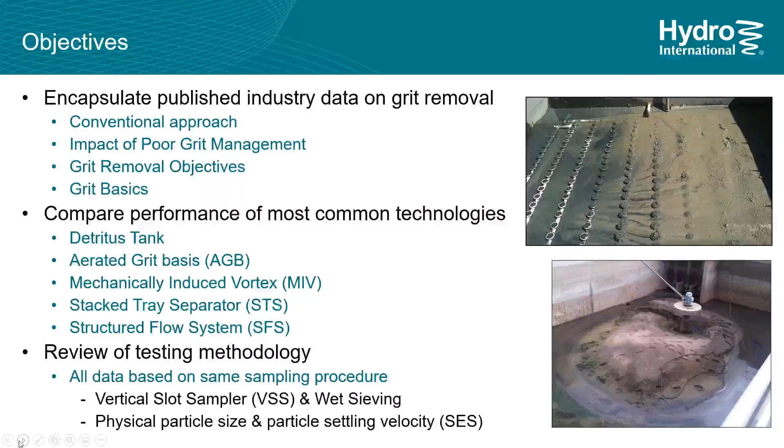The objectives of our presentation today are to encapsulate published data on the conventional approach to grit and why it has not protected plants from grit deposition and abrasive wear, the impact of poor or conventional grit management, grit removal objectives, and grit basics. We'll compare the performance of the most commonly used grit removal devices using a single consistent test methodology. By using the same test methodology, a comparison can be made of these common technologies. We'll also review the test method used and why it was found to be consistent, repeatable, and effective.

Grit management historically has been undervalued and until recently, in many respects, ignored. Traditional design guidelines have not protected plants from abrasive wear or deposition, and ease of grit system operation has been more important than the removal efficiency.

The current trend is to put a higher value on grit, similar to the trend the industry has seen in screening over the last number of years. Conventional screens were often very coarse, maybe 3/4 inch, while today probably the standard of the industry is about 1/4 inch or 6 millimeter. The trend has also been driven by advances in treatment processes. Plants are getting smaller and achieve better effluent quality in a smaller footprint. The smaller footprint leaves no capacity to store grit.

Advances in sludge processing and disposal options are less tolerant of both rags and grit. And plants are also operating with tighter budgets, meaning less staff and less funding to clean and repair equipment impacted by grit. But there are still challenges.

There's no industry standard for sampling or characterization of grit, nor a standard performance or removal requirement. In addition, owners and engineers are forced to navigate a field of what can be conflicting performance claims made by various equipment manufacturers using differing test methods, which makes these claims difficult to verify.

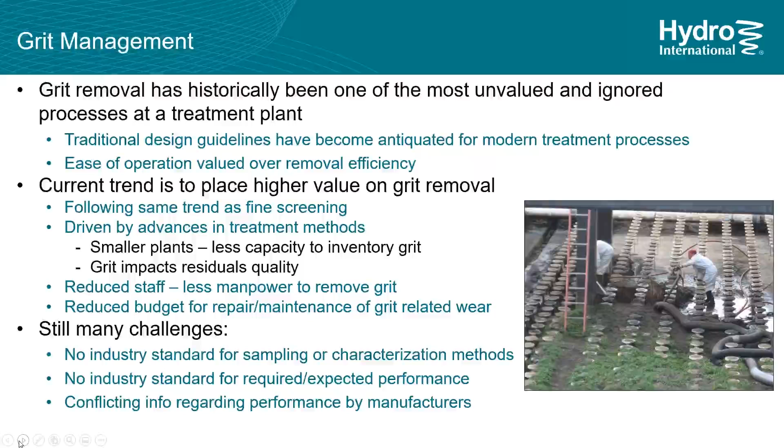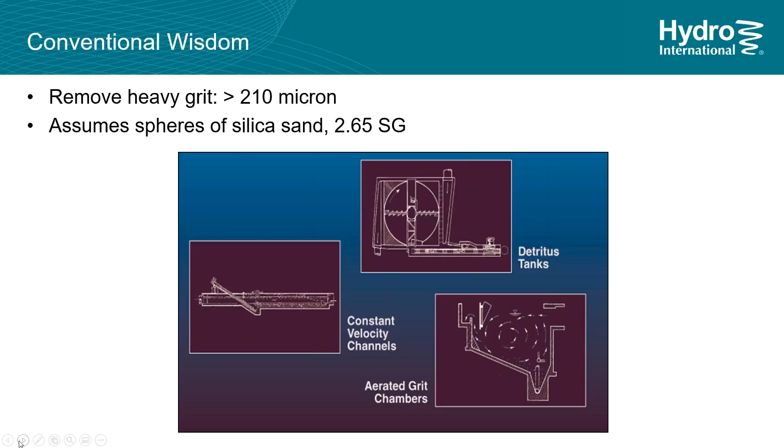So let's start at the beginning with the basics. The conventional wisdom or design point for grit removal systems has been 210 micron particles and larger. And that design point also assumes that all grit are perfect spheres of silica sand, all 2.65 specific gravity.

I traced this design point back to a 1942 paper written by Dr. Thomas Camp for Sewage Works Journal. The article was written when he was still a university professor and had not yet left academia to form Camp, Dresser, and McKee. Millennials, you may know the firm better as CDM.

And no, this picture is not Dr. Camp, but it is representative of the era and the technology of the era to show how long ago this design standard was adopted. In 1942, treatment processes were much less advanced and needed less protection from grit as well as screenings. At the time, many plants only had primary treatment processes. Secondary treatment processes were just being implemented and were not yet mandated.

In the paper, Dr. Camp states that experience, not data, indicates a 0.2 millimeter or 200 micron design point, and it generally removes grit, which gives trouble in treatment plants. That paper set the design point that has remained virtually unchanged and unchallenged for over 65 years.

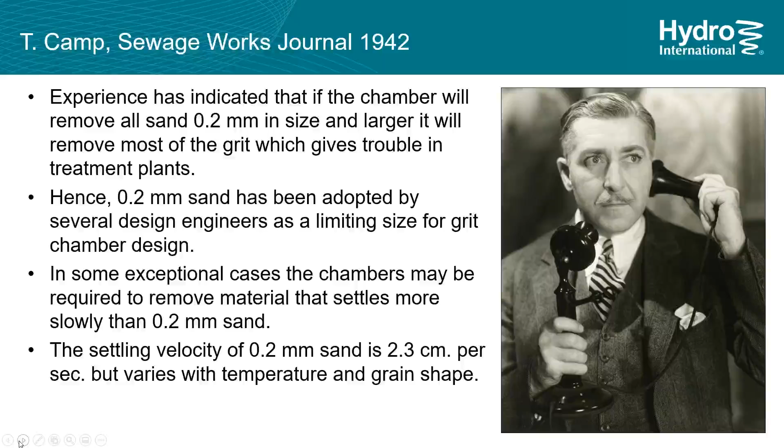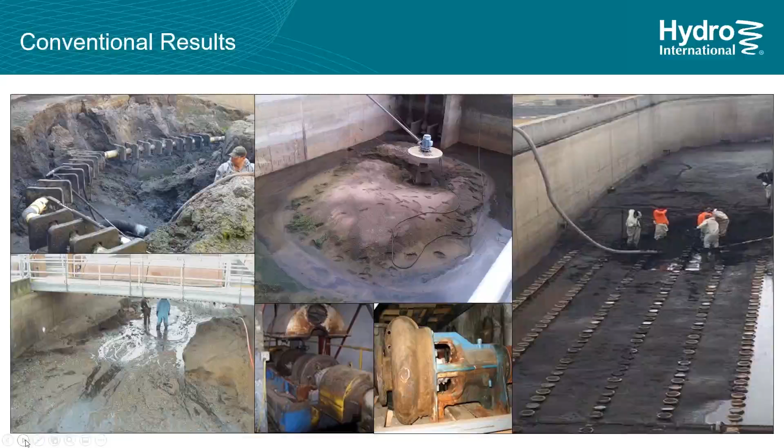That 60-plus-year-old design point does not protect plants from grit. These photos are not uncommon. Many plants deal with grit deposition in their aeration basins, primary clarifiers and digesters, and abrasive wear of mechanical equipment throughout the plant. So understanding grit is the first step in improving grit system design.

Grit is assumed to be perfect spheres of silica sand, all 2.65 specific gravity. If you've ever been in a wastewater treatment plant, you know that wastewater grit is made up of a variety of materials, shapes, sizes, and specific gravities, and all of those factors impact the grit settling velocity.

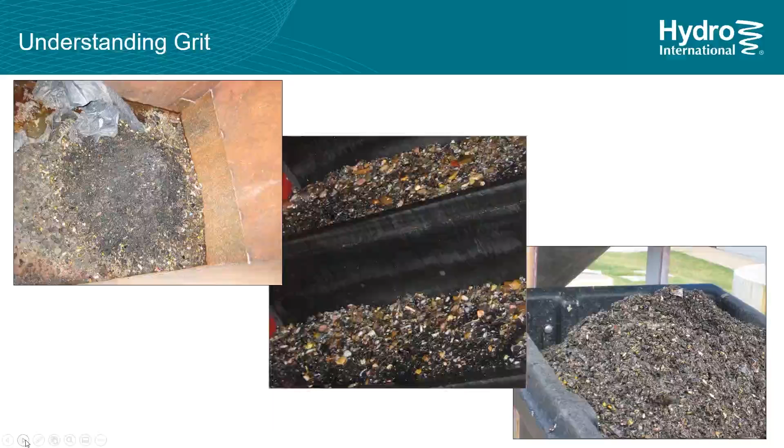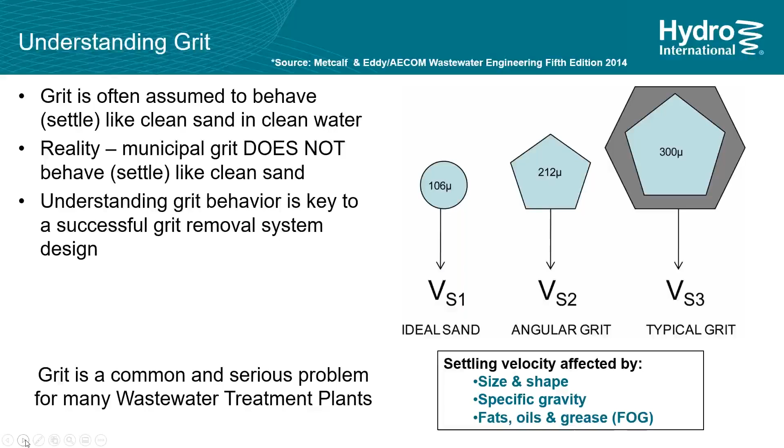While grit is assumed to settle or behave like clean sand, it does not. A sphere of silica sand of one size can settle at the same rate as an angular or irregular shaped larger particle, which has a higher drag coefficient than a sphere. An even larger particle of irregular shape and perhaps a lighter specific gravity can also settle at the same rate.

That's exactly what Hampton Roads Sanitation District found. Hampton Roads Sanitation District operates 13 wastewater treatment plants in Southeast Virginia. In 2007 and 2008, they started a journey to understand the effectiveness of their grit removal systems as they were planning an upgrade to their Army Base treatment plant. In the upgrade, they wanted to incorporate a grit removal technology that would protect the plant from abrasive wear, reduced operating volumes, and increased maintenance and repairs, issues they had experienced at several of the other plants.

In 2007 and 2008, they evaluated 3 different technologies at 5 of their wastewater treatment plants. They also tested 2 additional technologies to evaluate for the Army Base treatment plant upgrade. Both of these papers were presented at WEFTEC in 2009.

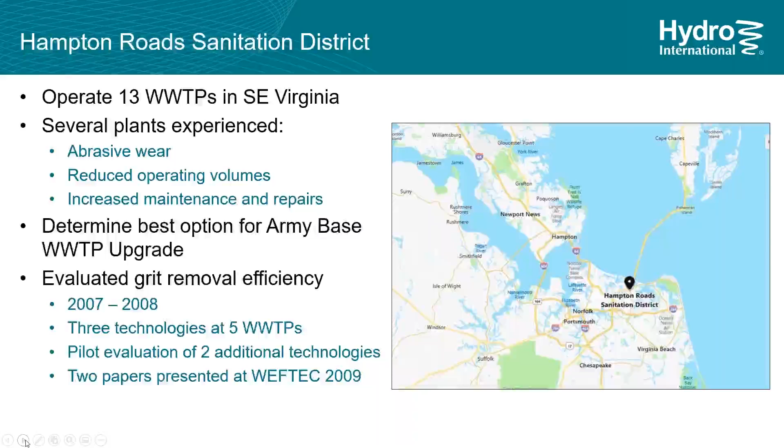The method they utilized was a vertical slot sampler, which is a PVC pipe that's placed in the channel. The pipe has a slot cut to face upstream. Flow is pumped from the inside of the pipe, which allows a sample to be collected from the entire vertical water column. The bottom of the sampler or pipe is closed to prevent drawing material that's deposited on the bottom of the channel into the sample.

The slot width is a function of the stream velocity, channel depth, and the pump velocity. The slot width is sized so that the velocity into the pipe is the same as the channel velocity. This testing method has been used by many municipalities and engineering firms across North America for almost 20 years.

The sample is then pumped to a continuous collector, shown on the right, over a period of time, typically 4 to 6 hours, to account for variances in grit loading during diurnal flow variations. The collector is fed tangentially so as not to disturb and resuspend collected grit. It's fed into the collector at a rate that will maintain a low surface overflow rate, low enough to capture grit particles as fine as 50 micron.

After the sampling period, the material is allowed to settle, then water is decanted from the sample, loose floatable organics are rinsed away, and the excess liquid is drained. The sample weight and volume are recorded.

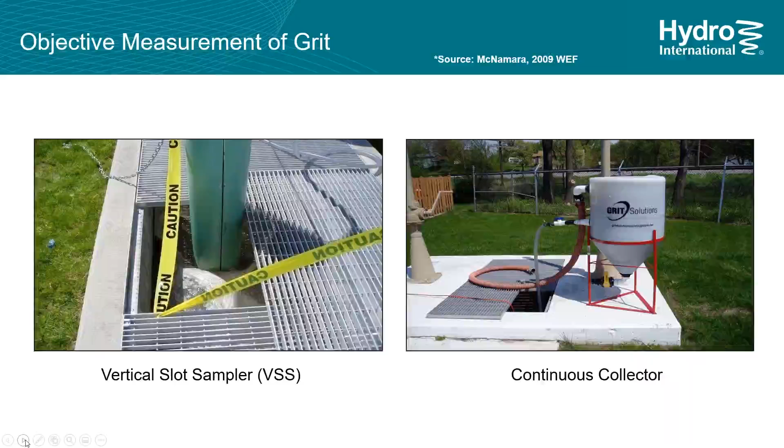The sample is then poured over a stack of sieves to separate the material into size fractions. Wet sieving allows accurate sizing of the grit as it appears in wastewater. Drying the sample in a muffle furnace will burn off any attached organic material and can fracture particles.

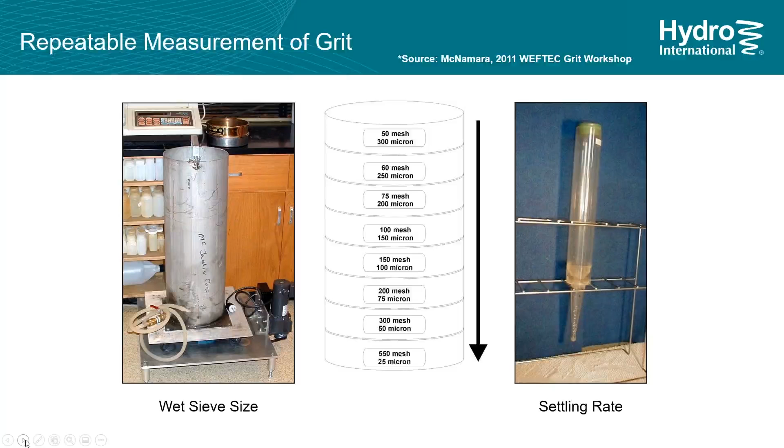The material in each sieve is then processed in a modified Imhoff cone to determine the settling velocity of the different size fractions. The modified Imhoff cone is used to measure the speed at which each wet size fraction settles. Grit settling velocity is expressed as SES, or sand equivalent size, which is the clean sand particle size that settles at the same velocity as the grit. It provides a way to correlate the behavior of grit to a common design point.

So if the clean sand particle, shown on the left, settles quickly, as seen by the long black arrow, but the same size grit particle settles slowly, we can normalize based on settling velocity back to a clean sand particle. So the grit particle, because it settles more slowly, settles at the same rate as a smaller clean sand particle. Then the grit system can be designed to capture the smaller clean sand particle, and it will target the slowly settling grit based on settling velocity.

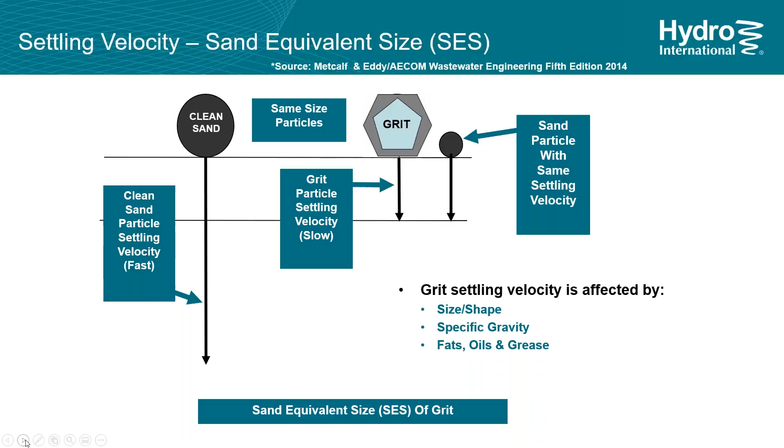This chart shows grit distributions from across the country where the physical size is shown in relation to the settling velocity, or sand equivalent size. Size distribution is shown across the x-axis, and SES, or settling velocity distribution, is shown across the y-axis. The black line represents the clean sand line. So a 400 micron sphere of silica sand would be expected to settle like a 400 micron sphere of silica sand, but the grit particles settle very differently.

Almost all of the grit particles settle more slowly than the 200 micron clean sand particle, as shown below the line. That 200 micron clean sand particle is the conventional design point for grit systems, and based on this data, the conventional design point would miss most of the grit based on settling velocity. Some particles in the 250 micron size range would be captured, along with some very large particles in a couple locations, but most of the grit would be missed.

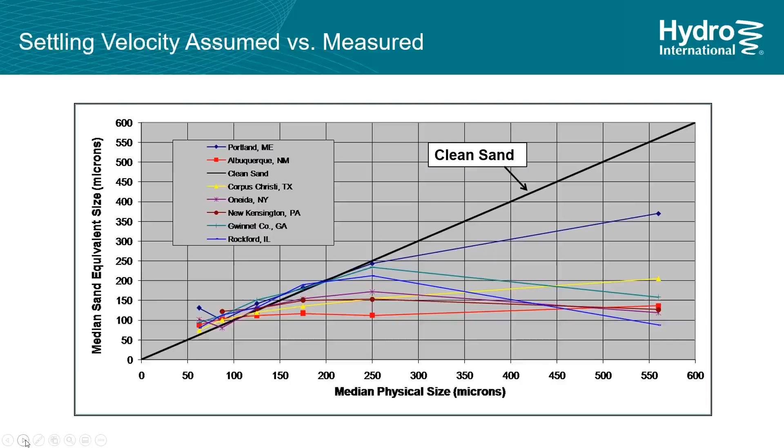With reference to the vertical slot sampling and testing methodology, Hampton Roads Sanitation District found the method to be consistent, repeatable, and effective. They considered the testing to be accurate as the results corroborated with system performance and the plant operating history. By using this common, repeatable test methodology, a comparison of the performance of the various technologies can be made, and it provides an unbiased performance comparison.

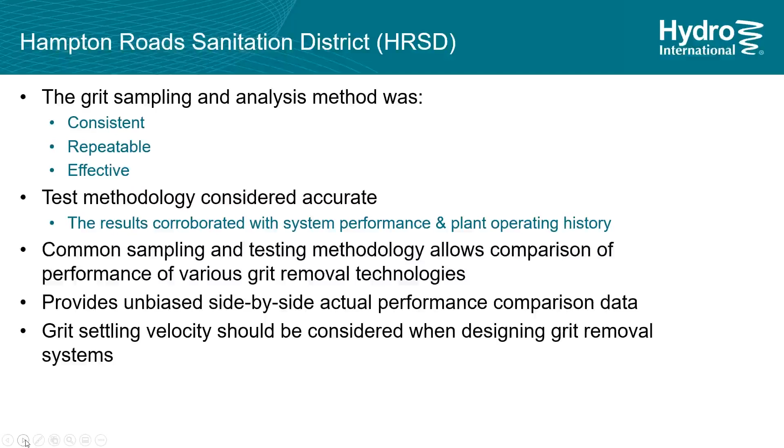The last note refers to grit settling velocity for the system. The performance comparison data that you're about to see is based on physical size alone, not settling velocity. But settling velocity is very important, as you saw in the last slide, and we will come back to the settling velocity later in the presentation.

This is a list of the most common grit removal technologies, and they're the 5 technologies that we will compare. The top 3 were operating at Hampton Roads Sanitation District's treatment plants. The last 2 technologies were pilot tested as part of the evaluation for the Army Base treatment plant upgrade.

Hampton Roads Sanitation District found that their plant with the aerated grit basin had a large collection system with very little grit making it to the plant during testing, which was performed during dry weather. Fortunately, Columbus, Georgia had tested their aerated grit basin using the same testing method, and they were kind enough to allow us to include their data for this comparison.

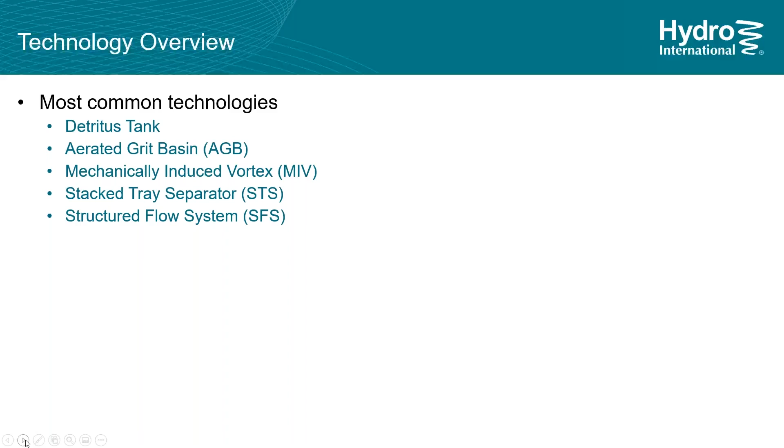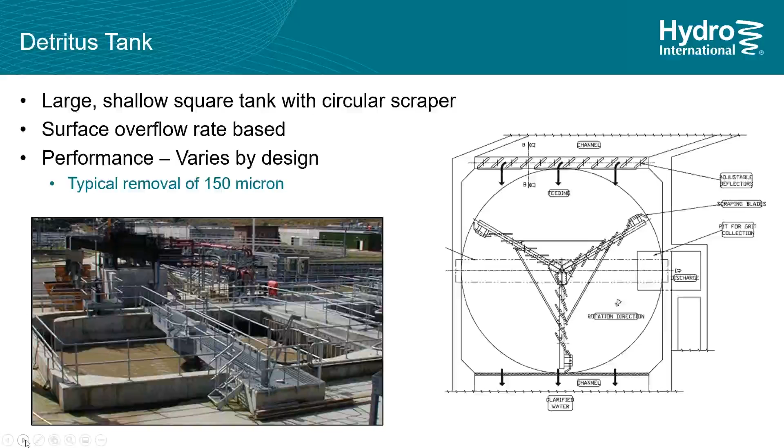We'll move through the technologies in the order listed here. First up is the detritus tank. It is an old technology to be sure, but there are still many in operation in the United States. A detritus tank is a large, square, shallow settling basin with a circular scraper to move the grit to a common collection point. It's sized based on surface overflow rate, and performance varies by design, but they're typically designed to remove grit 150 micron and larger.

The Hampton Roads Sanitation District James River Treatment Plant had a detritus tank. They tested over 3 days in June 2007. The units were running at 66% of their design capacity, and they collected the highest percentage of grit in the largest size range with lower removal efficiency as the particles get smaller. You'll see that as a consistent theme across all of the technologies.

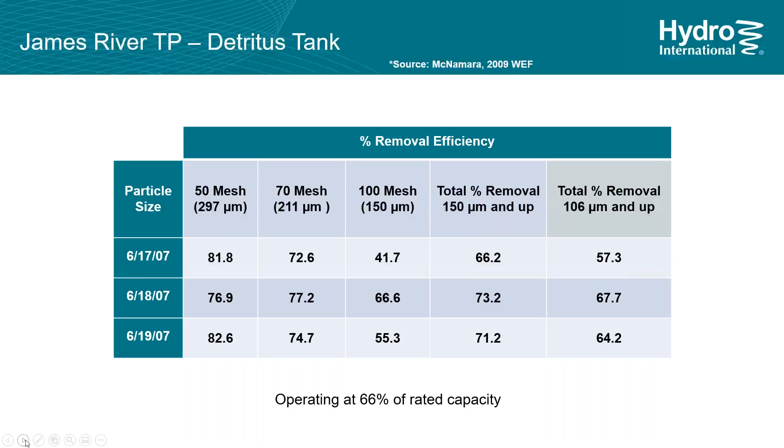The detritus tank removed 66 to 73% of all grit larger than 150 micron, which is its design point. So it wasn't hugely effective, but it wasn't also a terrible removal result. But keep in mind, it was also operating below its rated capacity. Overall removal of all grit 106 micron and larger was 57 to 67%.

The next technology to review is the aerated grit basin. Aerated grit basins are long, sloped bottom, rectangular tanks with flow moving the length of the basin. Diffusers are placed near the bottom along one side of the basin. Air is introduced via the diffusers to create a rolling or spiral motion perpendicular to the flow path. The heavier particles settle to the bottom while the air keeps the lighter organics in suspension. These are sized based on detention time, and performance varies by design, but they're typically designed to remove 212 micron and larger, that conventional design point for grit.

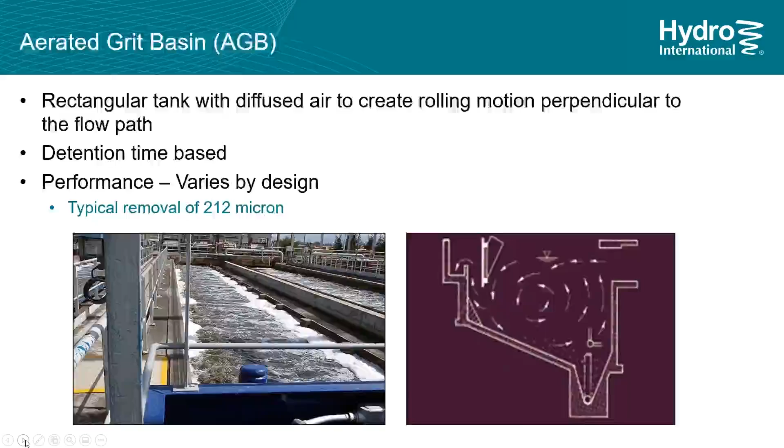Columbus, Georgia tested their aerated grit basin in 2008 using the same test methodology as was used by Hampton Roads Sanitation District. They tested for 3 days, and as we saw with the detritus tank, the aerated grit collected the highest percentage of the largest material with lower removal efficiency as the particle size gets smaller. On the first and third day, the aerated grit basin was operated at 66% of its design flow, and removal rates of all grit 106 micron and larger was 53 to 67%.

Not significantly different than the detritus tank when it was operated at 66% of its design flow. But you can see the results on the second day were dramatically reduced. This was because they had a rain event on the second day, and during that day, flow increased by 35 to 75% above average flow rate. The flow rate increase represented less than a 2-time hydraulic peaking factor. With the higher flow through the system, it operated with a higher surface overflow rate, and resulting grit removal dropped from greater than 50% all the way down to 32% of all grit 106 micron and larger.

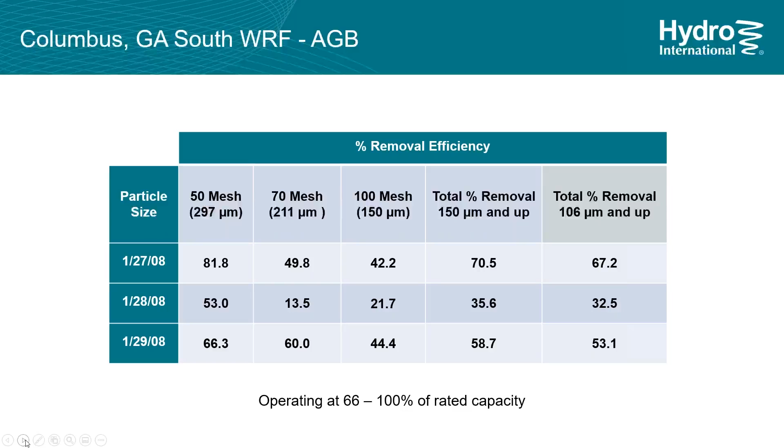As would be expected, when the flow increased, so did the incoming grit volume. The influent grit quantity increased from 28 pounds of fixed solids per million gallons to 74 pounds of fixed solids per million gallons. It was more than 2.5 times the average grit volume. A less than 2-time hydraulic peaking factor increased the grit volume by more than 2.5 times, and 32% removal of this higher grit volume would not protect the plant from grit deposition and abrasive wear.

The final 3 technologies are all Vortex technologies. So let's take a second here to understand Vortex Flow. Vortex Flow has been used to separate liquids and solids for about 60 years. The design benefits include minimizing short circuiting, extending the particle residence time, and sweeping the solids to a central location for collection. When centrifugal forces are high, the separation can occur in a very small footprint.

But in order to do that, the centrifugal velocities are high because it takes energy or head loss to drive that centrifugal velocity. As the head loss decreases, the centrifugal energy decreases, and device footprint has to get larger to accomplish the same separation. As the centrifugal velocity gets near or even below the force of gravity, the design benefits are reduced, and ultimately gravity governs the separation.

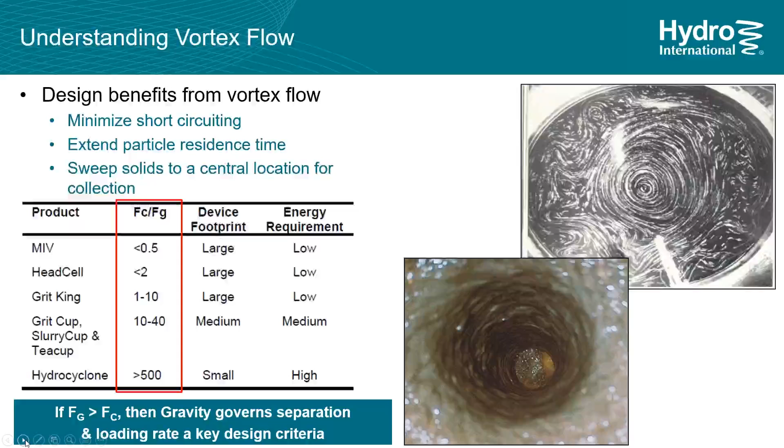The Vortex Grit systems used in the Headworks are typically low energy vortexes or forced vortex units. Low energy or low head loss units are needed to fit into a gravity flow hydraulic profile found at the front end of a plant. These units typically have a head loss of around 1 foot or less. As the head loss is low, there's not much force driving the centrifugal velocity, so it is also low and can be less than the force of gravity. When gravitational force exceeds centrifugal force, then gravity is the predominant force field.

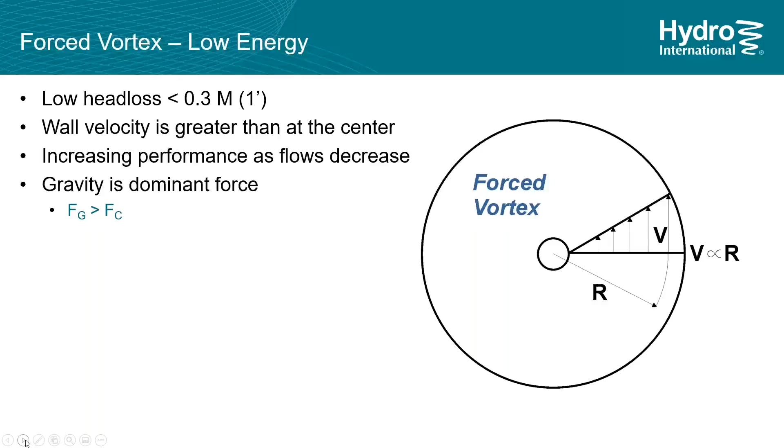Performance increases as flow decreases because surface overflow rate decreases as flow decreases, allowing the system to capture more particles. Very much in line with basic sedimentation engineering principles. So the third technology, the first Vortex technology, is the mechanically induced vortex technology. Hampton Roads Sanitation District tested mechanically induced vortex units at 2 of their treatment plants. As mentioned, this is a forced vortex or low energy unit.

Flow enters a circular chamber via a sloped ramp and feeds tangentially into the basin. The liquid rotates in the basin and exits above the inlet channel. A paddle is used to create what's called a toroidal flow path to assist with sweeping solids to a central point for collection. The paddle is needed as the centrifugal forces are low, and therefore the benefit of sweeping solids to the center for collection needs this assistance.

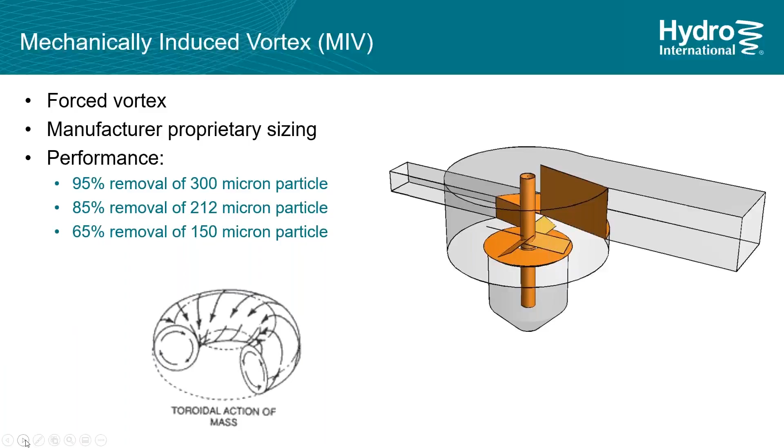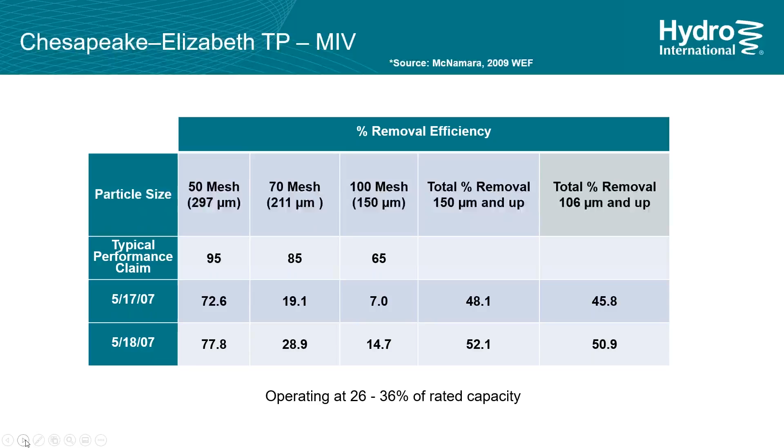Sizing for this technology is typically based on manufacturer's standard designs, and typical performance is 95% removal of 300 micron particles and larger, with lower removal rates as the particles get smaller. The Chesapeake Elizabeth plant was processing 26 to 36% of the rated capacity in their Vortex units during testing. Again, we see this unit collected the highest percentage of the largest material with lower removal efficiency as the particle size gets smaller. You can see that the removal rate measured was well below typical claimed performance, even though the unit was running at only about a third of its design capacity. Overall removal of all grit 106 micron and larger was 45 to 50%.

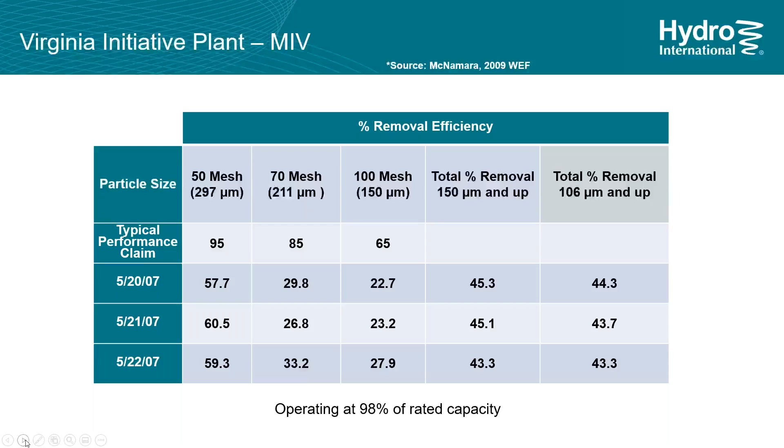A mechanically induced vortex unit was also tested at the Virginia Initiative plant. Again, the removal rate is highest for the largest material and decreases as particle size gets smaller. This unit was operating near design capacity, yet measured removal rate was still well below the typical claimed performance. Overall removal of all grit 106 micron and larger ranged from 43 to 44%.

The next technology was one of the two technologies Hampton Roads Sanitation District pilot tested for consideration in the Army Base treatment plant upgrade. The stacked tray system, or as HRSD referenced it in one of their papers, the gravity settling unit, is also a free vortex or low energy unit.

The stacked tray system utilizes a set of conically shaped polyethylene trays stacked one on top of another. The flow is split evenly between the trays. By splitting the flow between the trays, the surface overflow rate for each tray is low, which improves capture efficiency. Sizing is based on surface overflow rate and the desired cut point particle.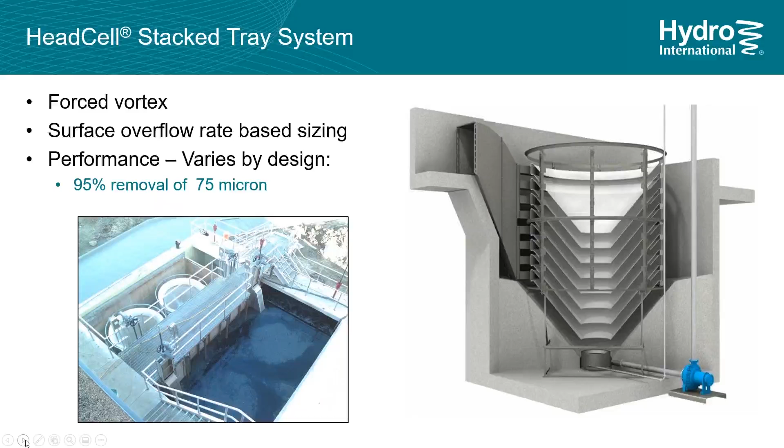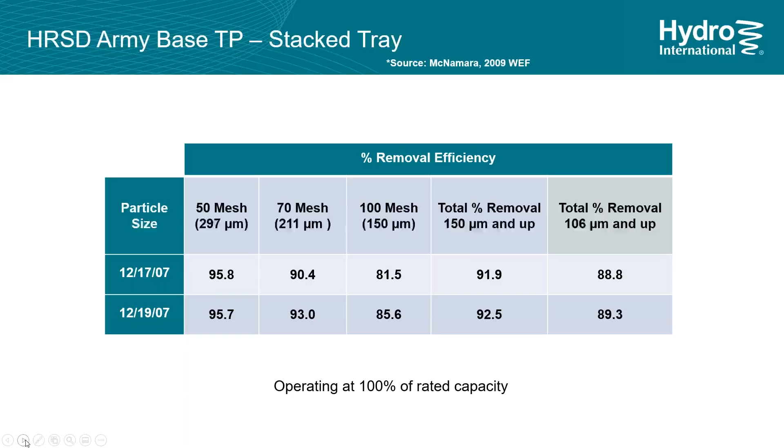These units can be designed for 95% removal of all grit 75 micron and larger, but are more commonly sized for 95% removal of all grit 106 micron and larger. As the stacked tray unit was a pilot unit, it was operated at its design capacity. Again, we see higher removal rates for the largest particles and slightly lower removal as the particles get smaller, although it's not as steep of a drop-off as we saw with the other technologies. Overall removal of all grit 106 micron and larger was high, ranging from 88 to 89%.

And the final technology to review here is the stacked tray unit. This was the other technology that was pilot tested. It was operated near its design. The final technology is a structured flow vortex.

This too is a low energy vortex. The structured flow unit has internal components to structure the flow and create a very specific flow path, allowing the flow to pass through while the grit is retained in the unit until it has adequate time to settle and be captured. These units are sized based on a volumetric loading rate and are typically designed to remove 95% of all grit 106 micron and larger.

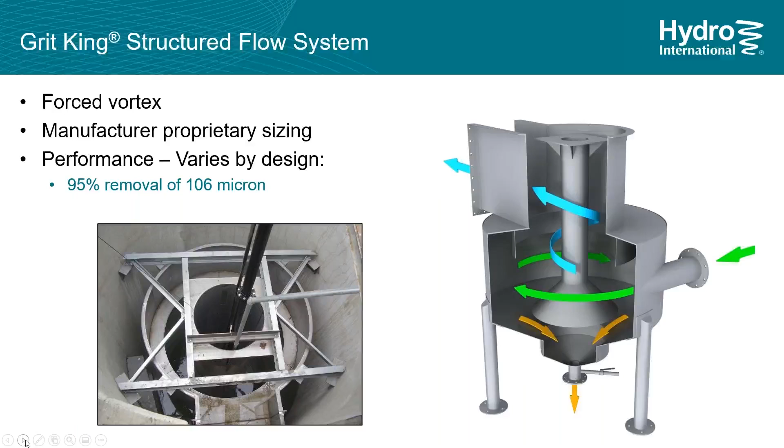The structured flow unit was tested at flows ranging from 66 to 100% of design. Again, similar to the other technologies, the removal rate of the largest particles is the highest, but also not as dramatic of a drop-off in removal of the smaller particles. Overall removal of all grit 106 micron and larger was 87 to 92%, with the higher removal rate observed at the lower flow rate.

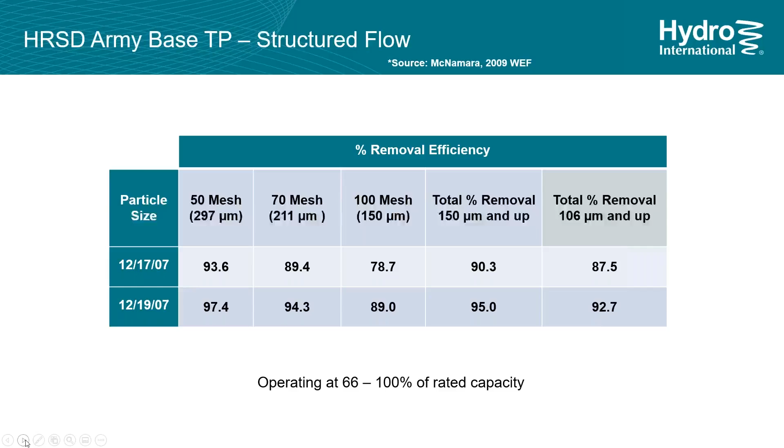When we compare all the technologies, we see that the detritus tank removed 57 to 68% of all grit 106 micron and larger when running at 66% of design capacity. The aerated grit basin removed about 67% of all grit 106 micron and larger when operating at 66% of design capacity, but removal dropped all the way down to 32% when flows increased during the wet weather day and the aerated grit basin was running at its design flow.

Had the detritus tank seen its full design flow, removal rates would be expected to drop, similar to what happened with the aerated grit basin. A higher flow rate means a higher surface overflow rate, which results in lower capture efficiency.

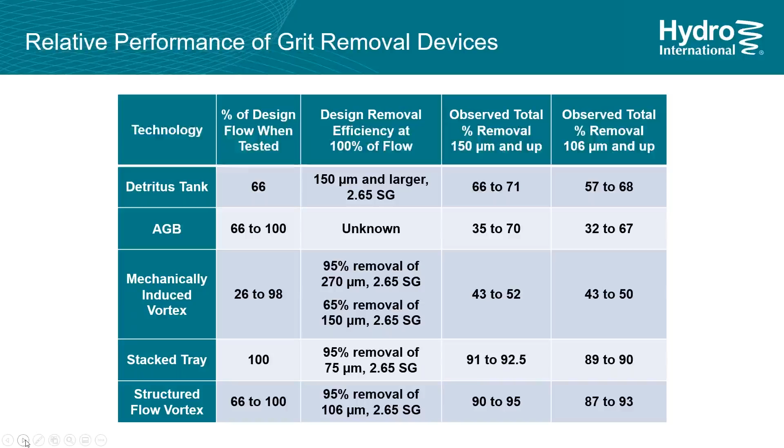The mechanically induced vortex units removed about 43 to 50% of all grit 106 micron and larger at flows ranging from 26 to 98% of design. The removal rate did improve as flow decreased, although not as dramatically as seen with the aerated grit basin. The stacked tray system removed 89 to 90% of all grit 106 micron and larger when running at design, and the structured flow unit removed 87 to 93% of all grit 106 micron and larger.

Hampton Roads Sanitation District found the testing to be consistent, producing repeatable and accurate results. The findings corroborated with plant operating history and experience. Again, they considered the test methodology to be accurate. All systems saw reduced efficiencies as flow rate increased, indicating that gravity is the prevailing force and sedimentation engineering principles apply.

The aerated grit basin and mechanically induced vortex units had the worst removal rates. The stacked tray and structured flow units had the best removal rates, with removal rates 20 to 55% higher than the other technologies.

That's a significant improvement over the conventional technologies. As noted with reference to the Columbus data, grit quantities increased significantly due to the effect of wet weather. The less than 2-time hydraulic peaking factor resulted in a solids peaking factor of over 2.5 times, indicating that the grit system should be effectively removing grit during those wet weather events.

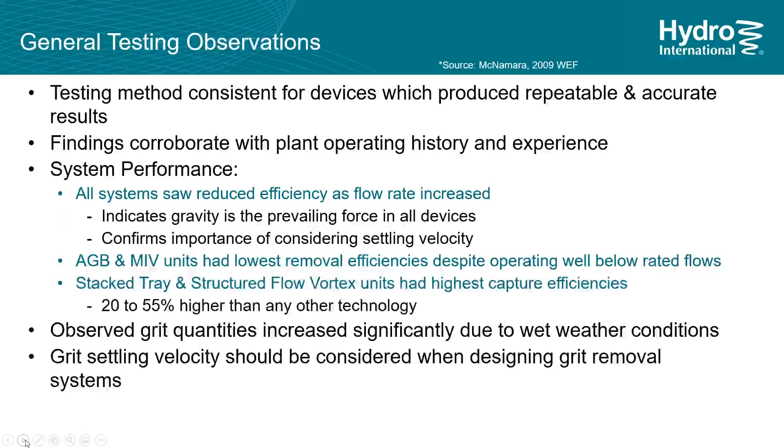In order to target a large portion of the grit coming into the plant, the settling velocity should be considered for the design. When settling particles, the settling velocity is obviously an important criteria. As mentioned at the beginning of this presentation, the current trend is to put a higher value on grit removal. The changes started around the time that Hampton Roads Sanitation District began their grit journey.

As a part of this new focus on grit, since about 2007, WEF, the Water Environment Federation, assembled a grit task force, and both industry design manuals have updated their chapters on grit. Both design manuals discuss targeting smaller particles and that the conventional 212 micron design point does not protect plants from grit abrasion and deposition. Metcalf and Eddy even discusses the importance of considering settling velocity or sand equivalent size.

In 2017, WEF's Grit Task Force published guidelines on grit sampling and characterization methods. The purpose of the publication was to review currently used grit sampling and characterization methods. One of those methods was the vertical slot sampler method that we've discussed here today. While the publication does not recommend any single sampling method, it does offer some insight into grit characteristics.

Grit chambers, including vortex chambers, use gravity settling to remove grit from wastewater, and grit particles in sewage behave or settle like discrete particles. Therefore, the settling velocity of incoming grit particles, rather than their size, provides the best criteria for system design.

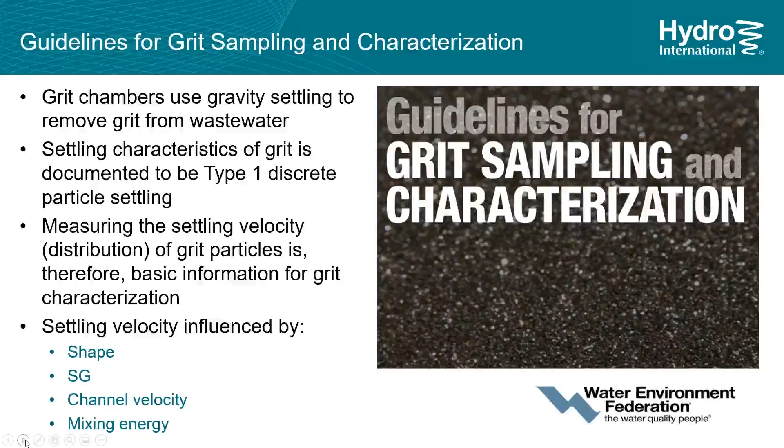Those systems were designed based on the conventional design point of 212 micron, and removal rates ranged from 32 to 68%. But by sizing the grit system to target a smaller particle, the 106 micron size that I've referred to through these comparisons, the grit removal efficiency improves to greater than 95%, regardless of whether we're talking about physical size or settling velocity. A 106 micron design point would virtually double the expected grit capture rate and allow very little grit to pass the headworks and into the plant.

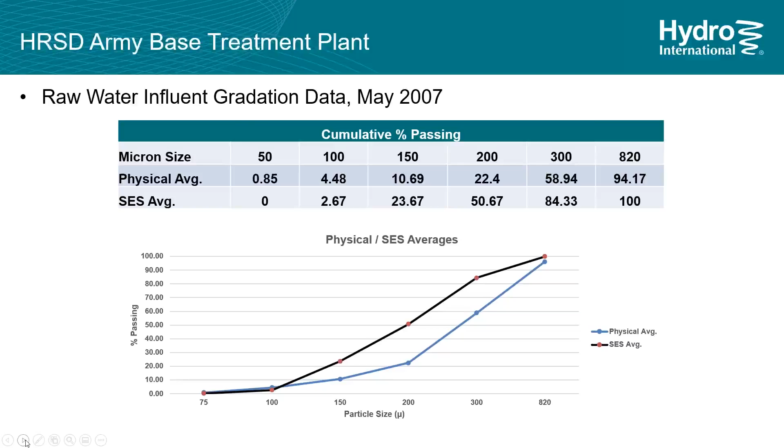When designing the new grit system for the Army Base treatment plant, 50% removal was not adequate. The goal was to eliminate abrasive wear, the reduced operating volumes, and the increased maintenance and repair costs that Hampton Roads Sanitation District had seen at their other plants.

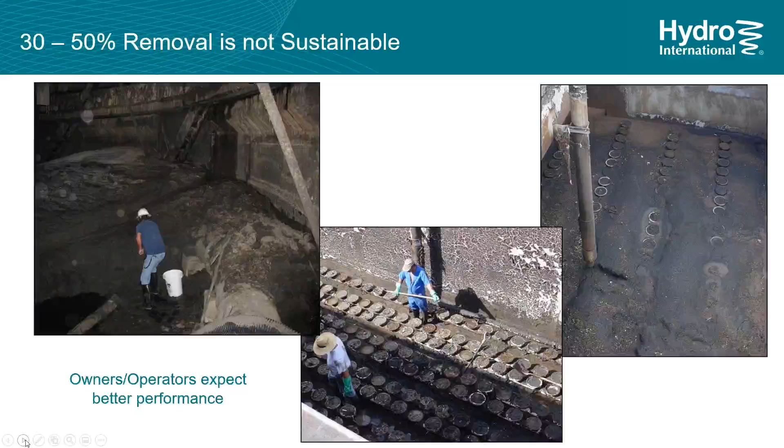If grit's not managed in the headworks, it's managed throughout the rest of the plant. It takes up volume in process tanks, reduces treatment volume and treatment efficiency, increases basin velocity. Grit accelerates wear on all mechanical equipment downstream, such as screws, mixers, pumps, and sludge dewatering equipment.

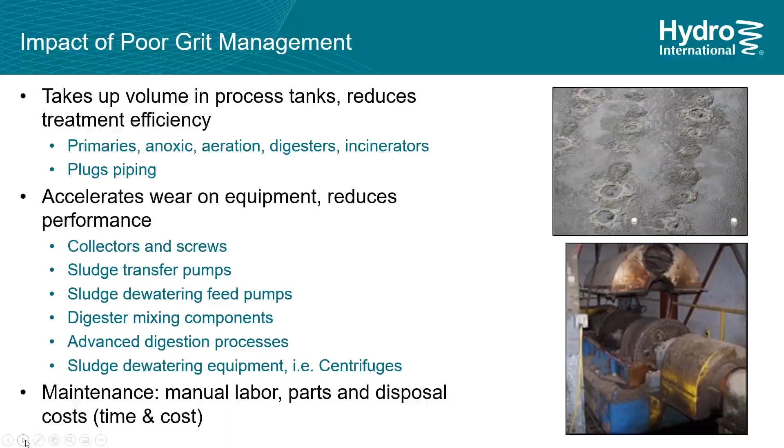In aeration basins, grit can bury diffusers, which then require additional horsepower to achieve proper treatment. In digesters, grit accumulations can lead to poor mixing, foaming, low volatile solids destruction, reduced gas production, and other issues. These issues can lead to increased labor and increased maintenance and operating costs.

When designing the upgrade for the Army Base treatment plant, the design was to incorporate biological nutrient removal and would include a new headworks. Hampton Roads Sanitation District chose the stack tray unit for their grit removal system. They installed 2 12-foot 12-tray HeadCell units to process a total of 49.5 mgd and remove 95% of all grit 110 micron and larger.

The system was started in 2015 and performance tested in 2016 using the same vertical slot sampler method. The results were excellent. The HeadCells removed 98 and 95% of all grit 105 micron and larger.

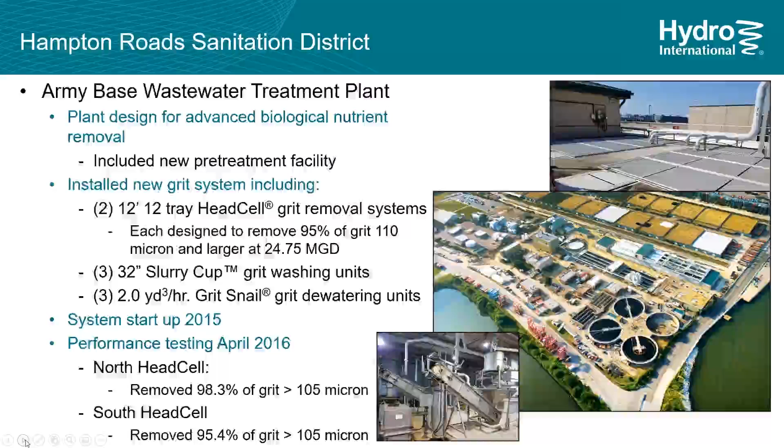This is a summary of the papers written by Hampton Roads Sanitation District covering their grit investigation. All have been presented at WEFTEC. The first 2 include the evaluation of the various technologies. The material from those 2 papers was compiled into the last paper, the relative performance of grit removal devices, which included the comparative data you saw here today.

Following the original technology evaluations, and because the mechanically induced vortex technologies that were tested performed poorly, Hampton Roads Sanitation District put together a team to understand why and attempt to develop design modifications to improve the performance of those units. They developed 10 different baffle designs that were modeled and tested. That investigation became another paper, also presented at WEFTEC in 2012, How to Baffle a Vortex.

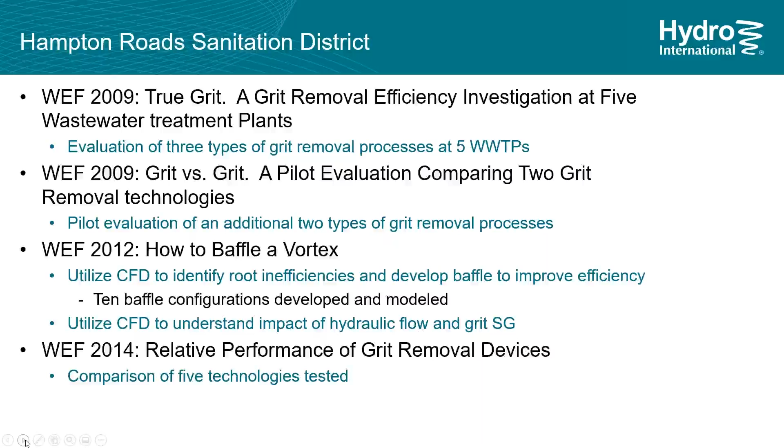The evaluation of the mechanically induced vortex technologies included CFD modeling as well as field testing. They found that the CFD model matched field data and could be used for their investigation. The mechanically induced vortex units had hydraulic short circuiting and collection efficiency decreased with increasing flow. Again, higher flow, higher surface overflow rate, lower removal efficiency.

The technology was fairly efficient at capturing very large particles, larger than 400 micron, but it was inefficient at capturing particles smaller than 300 micron. They also found that the vortex motion was not the principal component for grit removal.

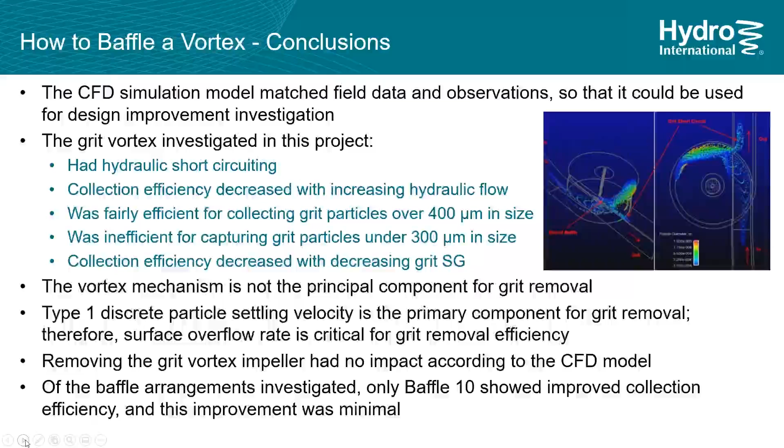The principal component was particle settling velocity, and therefore surface overflow rate is the key design criteria. The grit impeller or paddle did not impact grit removal, and of the 10 baffle designs investigated, only 1 showed improved collection, and that improvement was minimal.

So when designing a grit removal system, it's recommended to know your grit. Consider performing a grit characterization that includes both size distribution and settling velocity.

Unfortunately, a grit characterization is not as easy as taking a couple of grab samples. The influent must be sampled over a period of time in order to capture a representative sample and even just to capture enough material to process. A particle size distribution is a relatively easy standard method, but settling velocity is more complicated and more time-consuming to determine. In lieu of a characterization, regional grit gradation data can be used, and I'll talk more about that in a minute.

Type 1 discrete particle settling velocity is the primary component for grit removal devices, and therefore surface overflow rate is the key design criteria for grit removal efficiency.

The system should be designed for effective grit removal during peak flow and peak grit load, as we could see from the data in Columbus when, during their higher grit volume coming in, their removal efficiency dropped significantly.

And finally, select a grit removal technology which yields the highest value based on the treatment plant sophistication. A lagoon plant is much more tolerant of grit than a membrane plant or a plant that's designed to provide advanced biological nutrient removal.

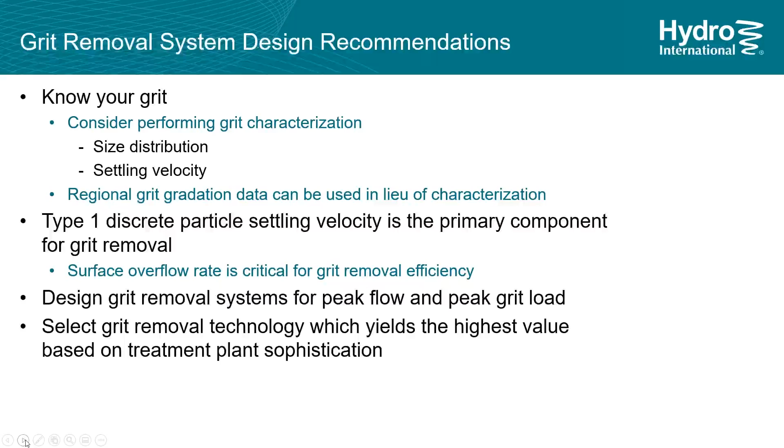I mentioned the regional gradation data. Hydro has assembled what we call our North American grit gradation data sets. They're available for several regions across the USA and Canada and for several individual states and provinces.

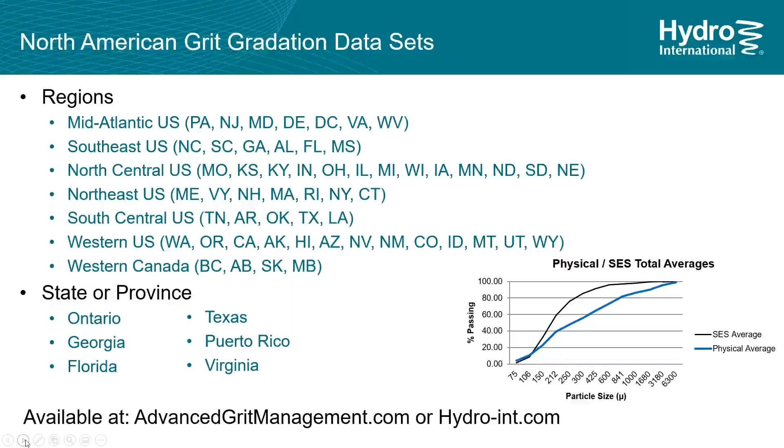If you're interested in gradation data for your region, just let me know. We're happy to share the information. The data sets all include both physical size as well as settling velocity.

So this presentation focused mainly on the grit collection component of the grit removal system, but when designing to capture a high percentage of incoming grit, it's important to carry that design requirement through the entire grit removal process.